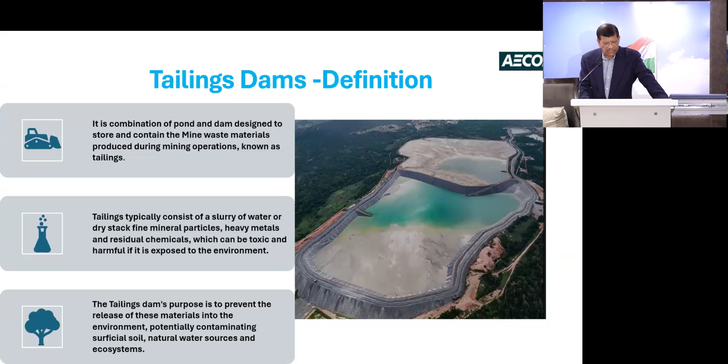In the initial phase, how can we store these fines? So the fines were converted into a slurry product where we add like 60 to 70% water into it and 30% solid, so that can easily take the material to a large distance through pipe.

So they were taken by pipe and got deposited. But we have to see that this slurry still contains all kinds of heavy metals and toxic materials, and also acidic materials, which can be harmful if exposed to the environment. So that's the main thing - that's why we cannot just let it go.

In the past, some people have told me that this slurry was diverted to a river, because people think that a river is a big flow of water, and if you put slurry onto it, it will dilute. But definitely that's not the case.

So we have to make sure that this slurry stays inside - it should not go anywhere else. That's why we are designing a dam to store it, so the dam will protect all the slurry material, and that is what's called the tailings dam.

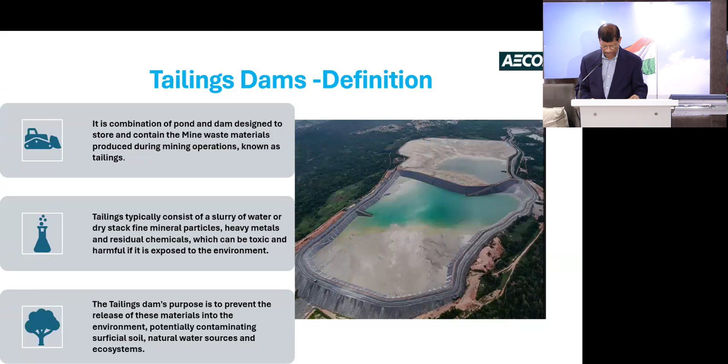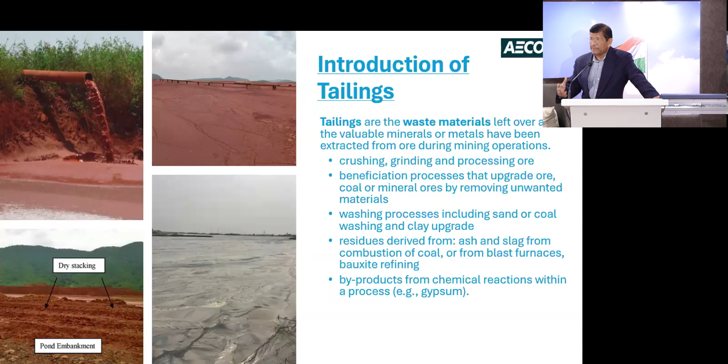And also a lot of plant chemical byproducts are also fines - the chemical reaction process like gypsum also collects fines. So these are where the fines are generated.

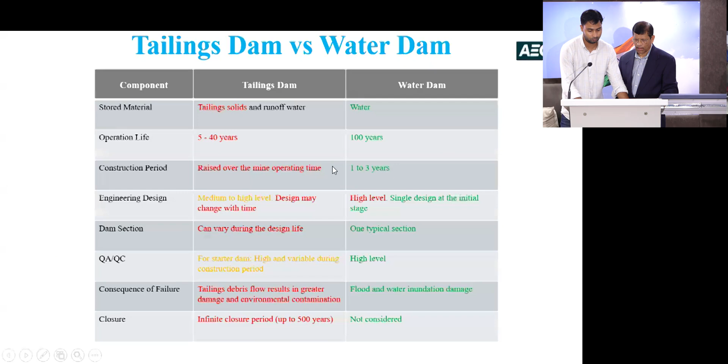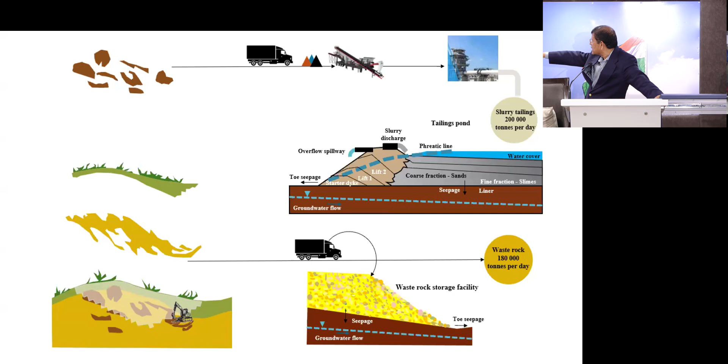This is a picture which demonstrates most of the process, how in the mines we have overburden and then the ores, and those ores are taken by a dump truck, dumped into a crusher, and then from the crusher it goes to the mill, and from the mill plant the finer waste is produced and stored in the tailings dam. You can see this is the dam structure, and the tailings along with water are stored in there.

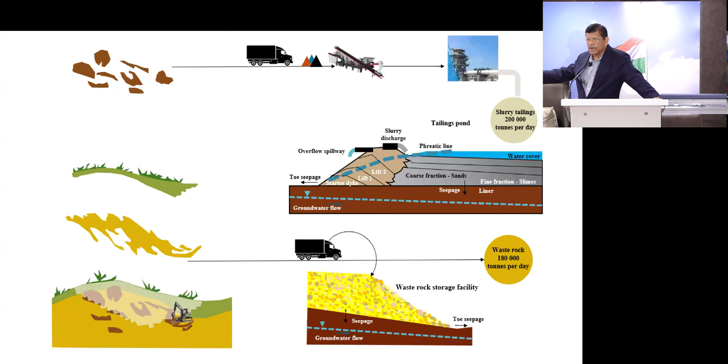The tailing process and the waste rock are different because the larger material, waste rock, which doesn't go to the crusher in the mines, is also deposited as a waste dump. But from an environmental point of view, the design consideration is the same - these waste materials also contain a lot of acidic and toxic minerals, which is why we want them not to come into contact with the environment.

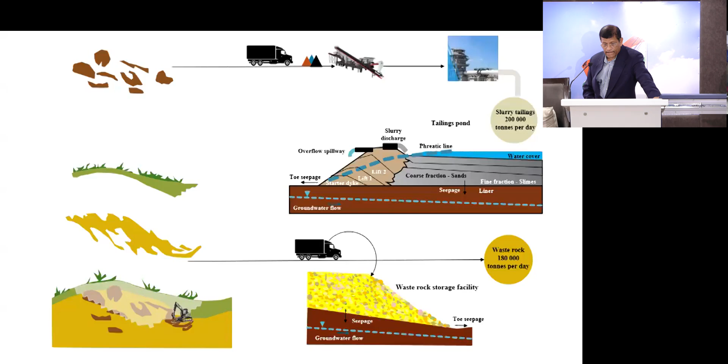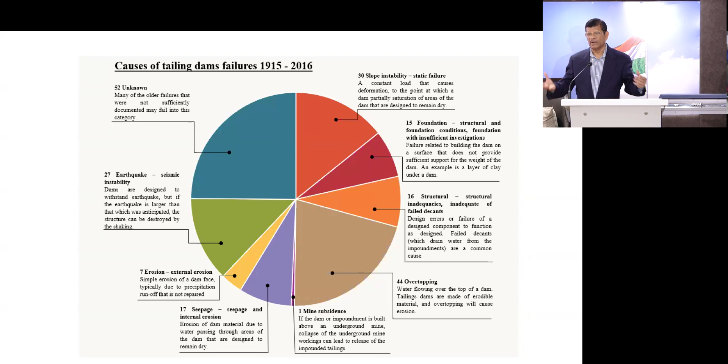What is the issue here? I mentioned that in the 1960s we started somehow storing these tailings, and by 1980 we found some failures, and those failures created devastating consequences for the community and environment. Then people thought, it is a different thing, we have to think again about some kind of design technology - that's why around the 1980s all kinds of design technology developed.

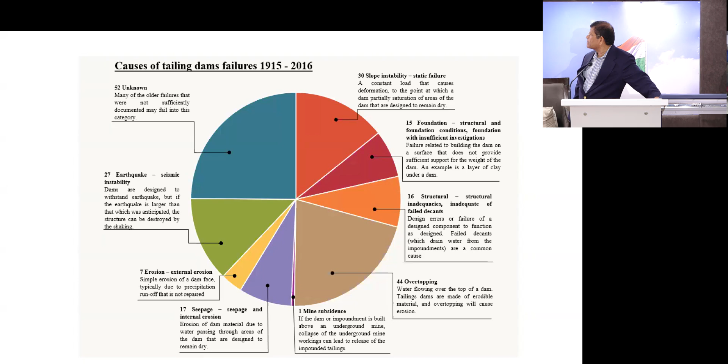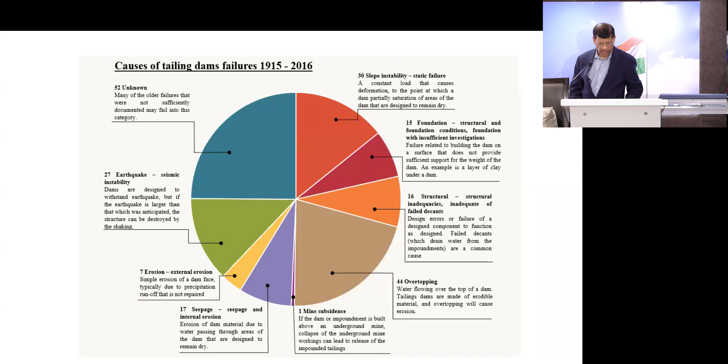With time you can see, from 1915 to almost 100 years later, we have seen a lot of failures, and these are the different causes of failure. We can see the better way to understand the failure, because the failure of tailings dams creates all these environmental considerations.

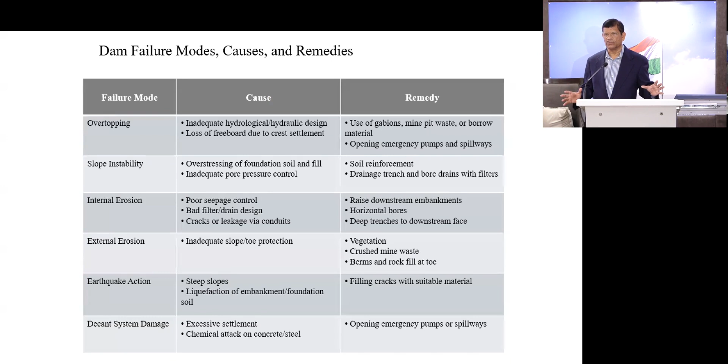Because if it is stable and it doesn't go to the outside or it doesn't interact with the environment, then everything is good. But when it fails, you can see that it is devastating.

One of the failures which we will discuss at the end is the Brumadinho failure. I want to focus on that one because that failure changed the whole concept of design of tailings and also brought that global industrial standard. Why is that? Because in that failure, close to 270 people died, and another important part is it happened in Brazil.

15 engineers who were associated with that tailings dam were arrested, and some of the engineers are still not free, because the case is still continuing in a court in Germany.

And there was another incident that happened in 2015, and recently that verdict came. The court fined $30 billion to the mining company because of the 2015 incident, where the 2019 incident is much larger than the 2015. So this one definitely will be more of an economical failure to those mining companies.

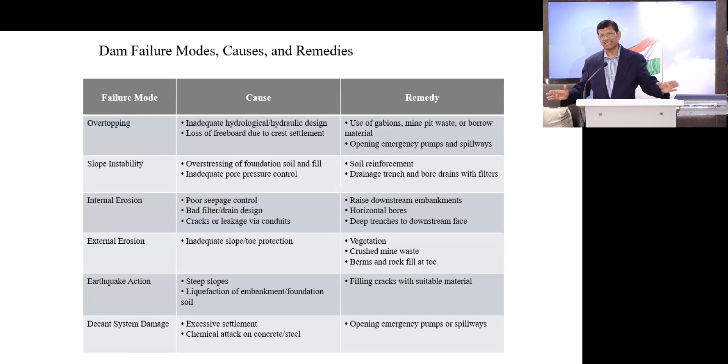That's why the people of England, like there is a church in England, they came up with a group of people, mostly an investor group. They came up with $20 billion generated, and the aim is to protect most of these tailings, mainly those tailings in very critical areas. Critical areas means very close to the population or where good critical structures are there. So in those areas they are focusing, and they are spending money to make sure those tailings dams are stable. That's why all this GISTM is coming.

But if you see the failure modes, the most important failure modes are overtopping and then slope instability, because we are making a dam there. That's like any earth dam, and these dams are very high also, some of them around 500 feet height. So those are slope failures, then internal erosion, also external erosion, then also earthquake, where the area is earthquake prone.

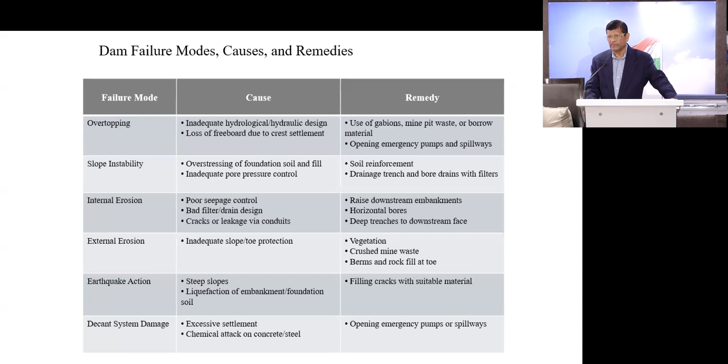Compared to the hydro dam, the tailings dams are more prone to failure during seismic activity. And then there is a decant system, which we will show in our next session, for water management. If the water management is not done properly, then there can be a failure. That's how these failures become important.

Initially, when people started designing the tailings dam, they thought that it's the same as any hydro dam. Even I think, by discussing here, people told me that in India also people thought it's a hydro dam, and they designed it on the same principle as the hydro dam. But when it failed, people realized that yes, this has to be treated separately.

So the basic difference between a tailings dam and a hydro dam we should all know, because the concept is coming from there. All we are doing - seepage, stability, even water management - everything is coming similar to a hydro dam. But we have to know the difference, because that is where we will change our concept when we deal with the tailings dam. So the first thing is the stored material.

The difference is in the hydro dam it's water, plain water. So even if there is a flood or it fails, it's water only, so the flood. But here it is the solid and the water combined. Solid and water combined is more devastating than the flood, because it is charged with these sediment particles. The energy is much higher than water when it fails. You will see that in one video.

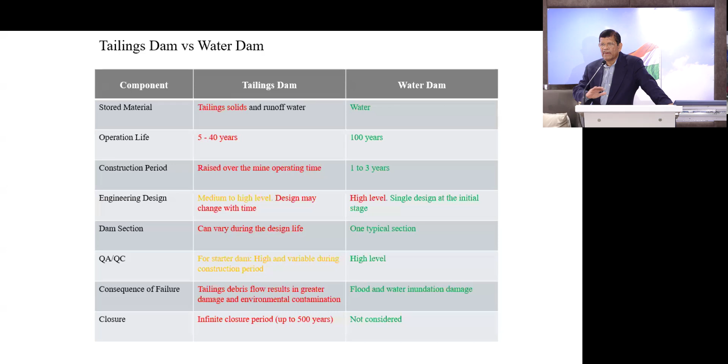Then the closure. This is a basic difference between a hydro dam and a tailings dam, because tailings dam has a closure. Once the mining is over, mining is stopped, we don't just leave it as it is. No, we cannot do that, because we have to make sure after mining, this structure is safe for the environment.

That's why from the beginning of the tailings dam, we also design the closure. Like when the tailings dam will get a permit, and mostly in US and Canada, when we go for the permits for the tailings dam, we have to show them this is our plan for the closure.

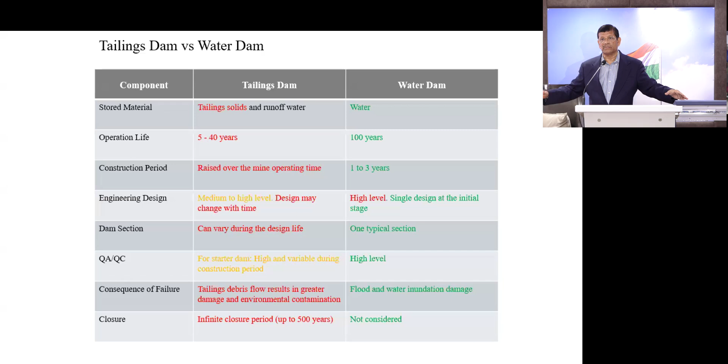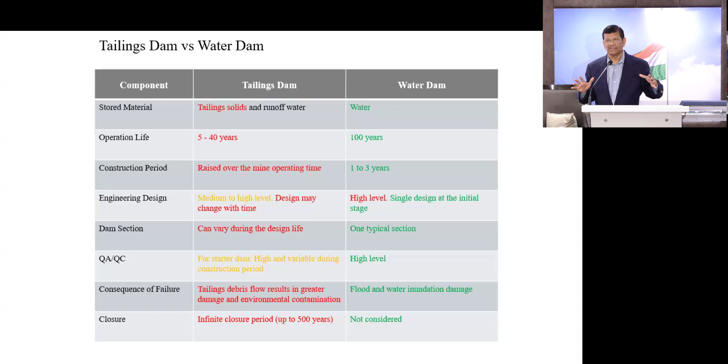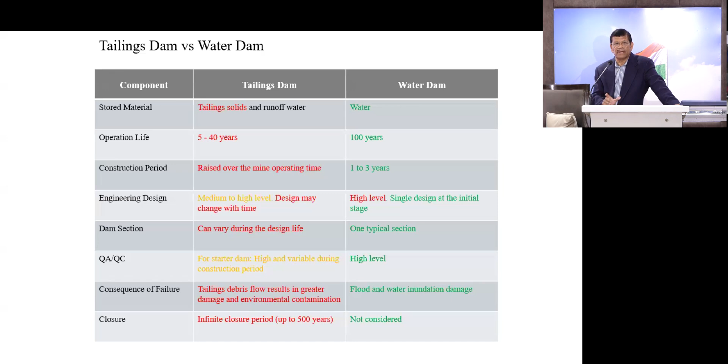So what the closure is, basically we put a cap on top of it, top of the whole dam. These dams are very large dams, you can see that their length is like 5 miles and width is like 10 miles. So all these structures will be capped and we have to make sure that it is environmentally safe. So this closure makes it completely different from the hydro dam, because hydro dam doesn't have any closure.

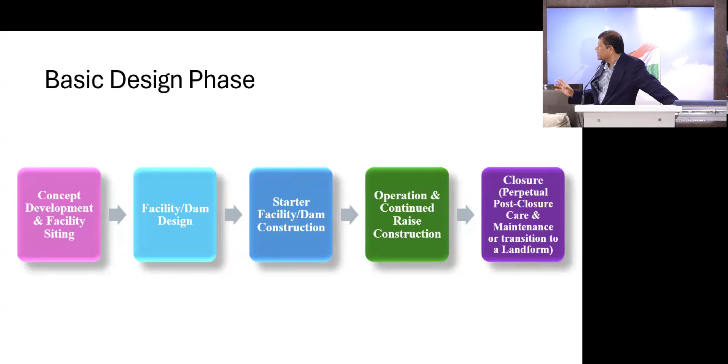Again, in the basic design phase, we start with a concept and we have a dam. How we will start with a basic dam design, we start with a starter dam. Any tailings dam will start with a starter dam, and that starter dam is an earth dam similar to the hydro dam, but that is a starting structure.

Then during the operation, then comes the operation. The initial construction phase is building a starter dam, then comes the operational phase. In the operational phase, the tailings dam is raised, and then final is the closure and also post closure.

Even after we do the closure, it might take some time to do that activity, and after we finish the closure there is also a post closure period, because we have to make sure these dams are stable almost forever, but right now people are thinking they will be stable at least 400 to 500 years. So after the closure part, we will also monitor it, that is our post closure.

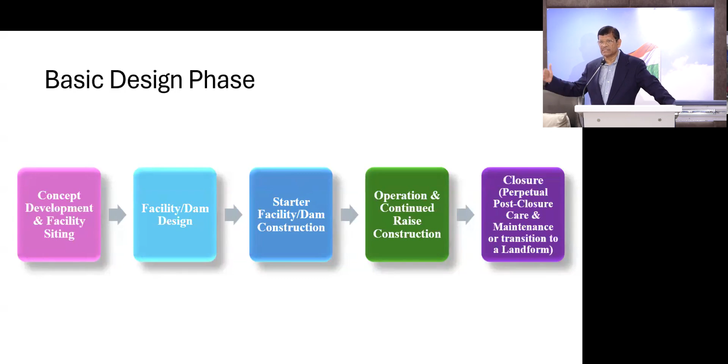So the basic design services, here we have 4 important players in the design of tailings dam. Can anybody guess who are the 4 important players here?

Definitely the first one is the owner, because he is responsible for the construction of this tailings dam. So the owner is number 1. Then the people who are helping them is the consultants. Then the third player is the agency, because any country, any state you go, there is an agency. In India also there is an agency, where when you first start you need their permission to do that. So the agency is the third player, and the contractor, because the contractor is the men who will be doing everything.

So these are the main four players, and these basic design services I will show you in the later part of the slide, like who is responsible for that.

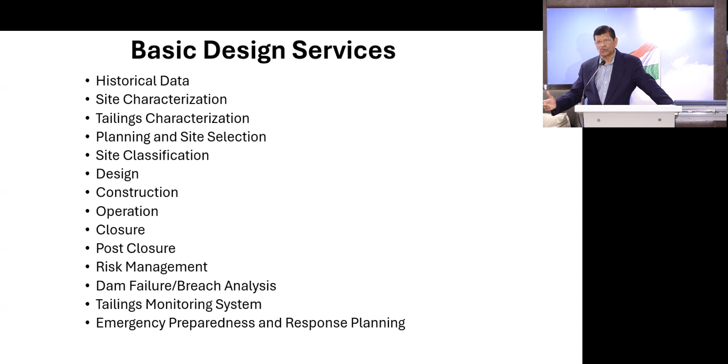Then we establish the tailings monitoring system, which starts from the beginning through closure and post-closure, because the monitoring has to show that the facility is stable and safe forever. There are many monitoring systems which we will cover in our courses.

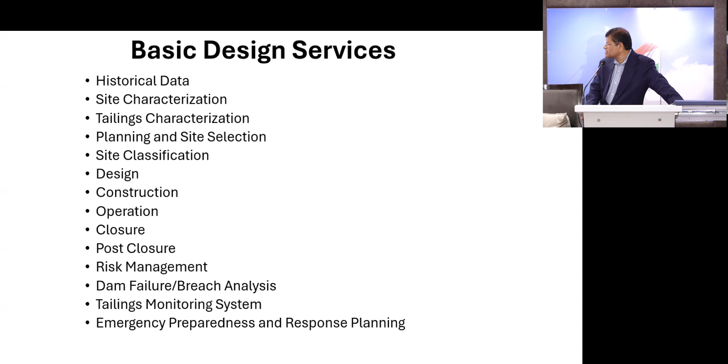Then the last part is emergency preparedness and response planning. Each tailing site should have that, because it's mostly needed at the time of failure, to know what you should do.

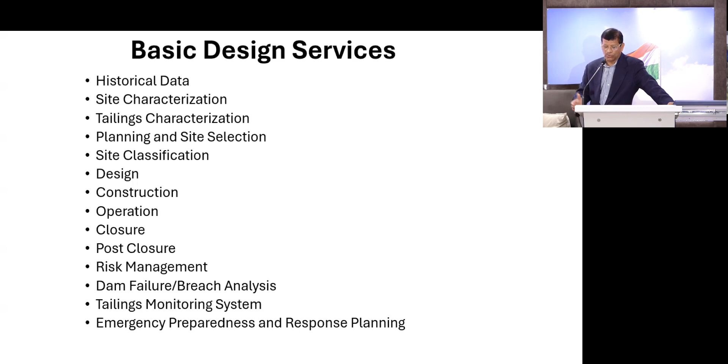So we start with a conceptual design, then move to pre-feasibility, then feasibility, and finally come to the detailed design.

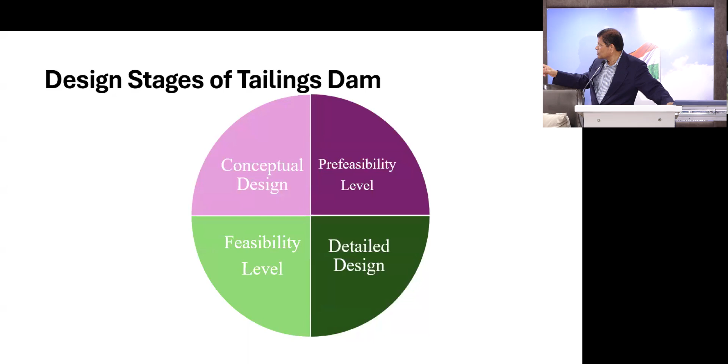Just as an example of how much money is spent during the design process: the pre-feasibility level expense averages 10 million for any particular site, and that's only for the pre-feasibility level. When you go to feasibility and detailed design, the cost can definitely be much more.

Again, on siting: mostly in mining areas, except where the plant is, because if you consider the plant, we're coming to plain areas like a coal plant or alumina plant. There you can also have a tailings dam in the plain area. But in mining areas it's mostly hilly, mountainous region, so there we look into the valley, like a single cross valley impoundment.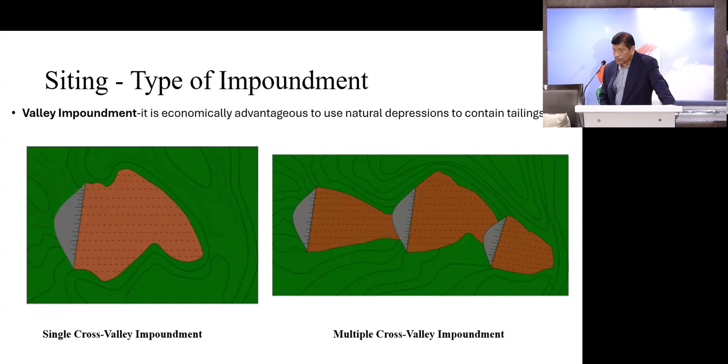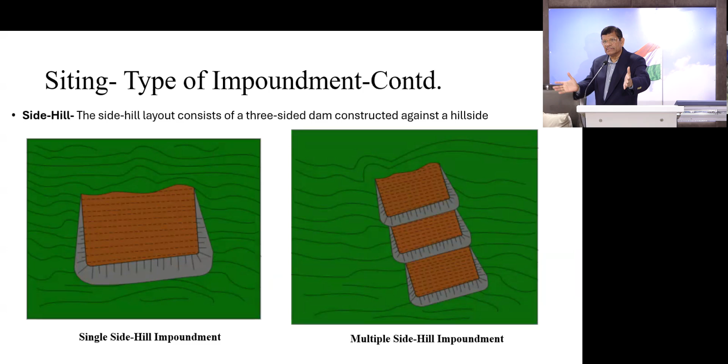This protects the structure. Or if there's a multiple cross valley, you can have multiple tailings sites there, at upper level, middle level, and lower level. Same thing on a particular hillside: in the cross valley, you are in the middle of two valleys, so you can have a small dam and take advantage of all the steeper slopes surrounding it.

But if it's a valley with a mountain on one side, then only one side has the mountain slope, and the rest you have to close off - this is a single side hill impoundment. On three sides you can have the dam, and in the middle you have the tailings.

Again, you can do this multiple times, starting from the top, then going to the middle, and at the bottom on the same slope.

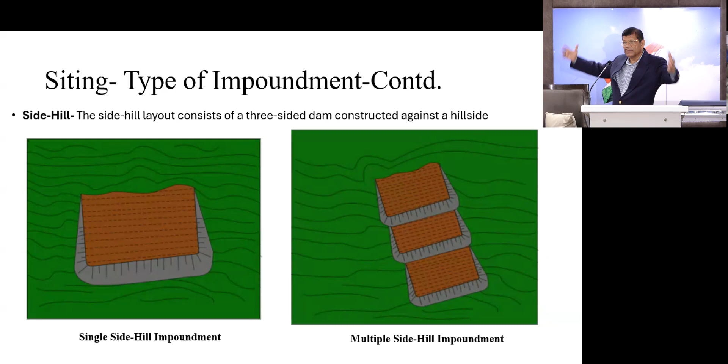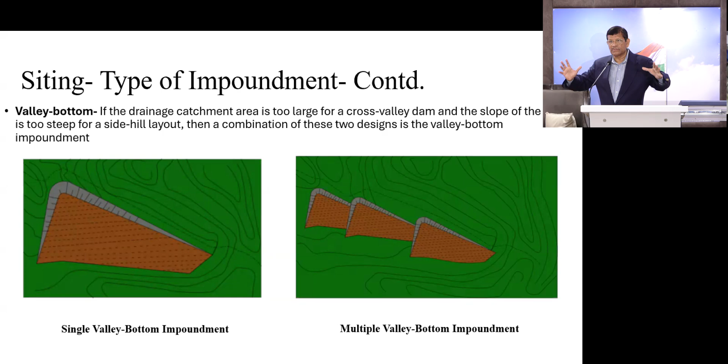Similarly, if it's a valley bottom, you can see that at the bottom side we can have a single valley bottom impoundment or a multiple valley bottom impoundment. Here we are mainly taking advantage of the natural slope. If it's a mountain with slope on one side, then definitely most of the structure will be more stable.

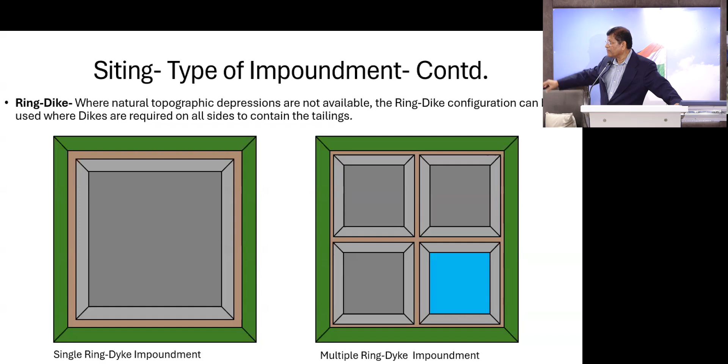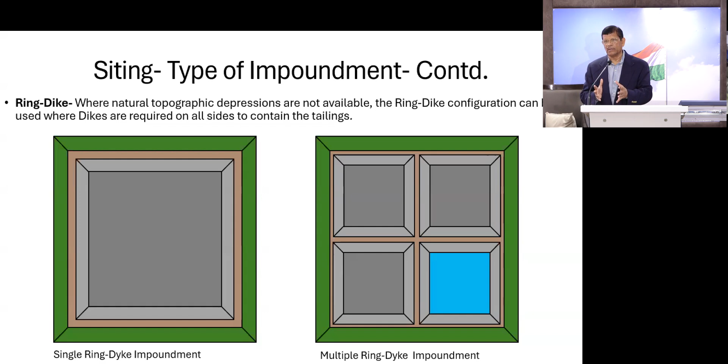So all this green is the dam, and in between, grey is the beaches. Again, you can have an impoundment there also, because all these tailings dams are not only storing the tailings, but also storing water - the storm water. So in our design, we will also have to consider the storm water.

The main criteria we look into in the design is geotechnical and geological conditions. That's the fundamental and number one criteria, because we have to make sure the geology of the site is helpful. What are the subsurface conditions there, and then when we design it, what kind of dam we can design, what kind of material. So geotechnical condition of those things are very important.

Then also we look into the hydrologic and climatic conditions, because most of the hydrology depends on the climatic condition. What is the rainfall? If there is a storm water, what is our PMP, probable maximum precipitation, that is called PMP. That is mostly used in most of the design, which we will cover in a later session.

Then the construction and operational factors. Definitely when you go and construct in a mining area, meaning mountain area, it's different. And when you construct in a plain area, it can be different. Then seismic activity, I mentioned before, if it is a seismically active region, you will have to consider it a very high level structure, and look into the seismic things. We will have a session also on this topic.

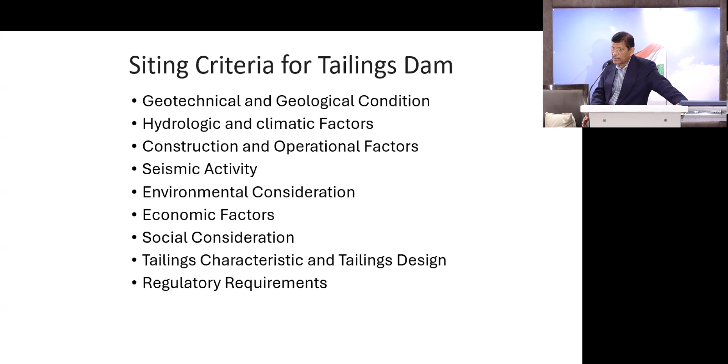Again, the tailings characteristics and their design and the regulatory requirements. Regulatory requirements varies from site to site, country to country. In US, we have a federal agency called EPA, Environmental Protection Agency. And also every state has a Department of Environmental Quality. Both EPA and the state department will be involved in all the stages, from the planning, giving the permit, to the operation, to every stage they will be involved.

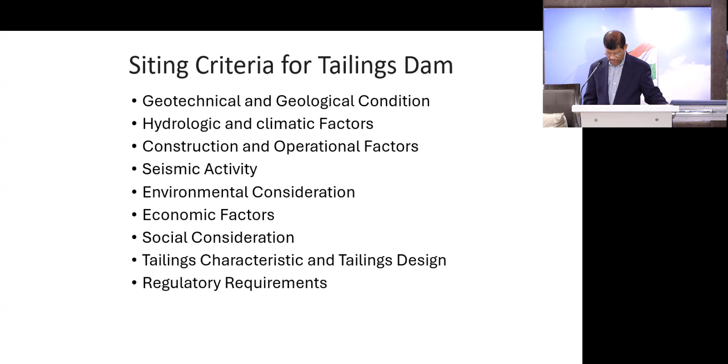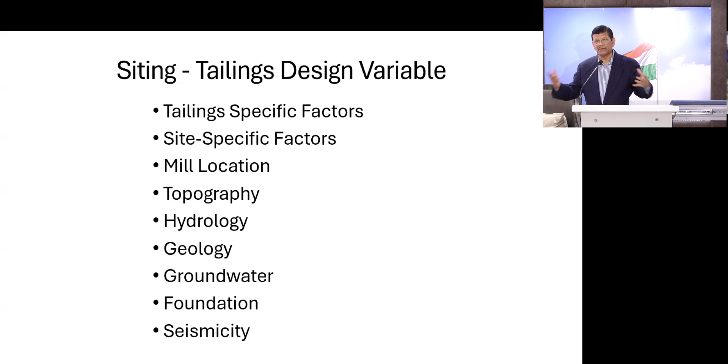Then the foundation of the tailings, because these are very large structures taking a lot of load, we have to make sure the foundation is good. One major failure happened in Canada called the Mount Polley failure, and that occurred because in their foundation there was a 3 feet clay layer which was somewhat ignored during the design process. They couldn't see that, or even if they saw it, they thought that 3 feet layer was okay and would not cause any more damage to the structure. But when it failed, all the experts who determined the cause of the failure said that the 3 feet layer was responsible. It may be a very small layer, but if that layer fails, then all the material can go.

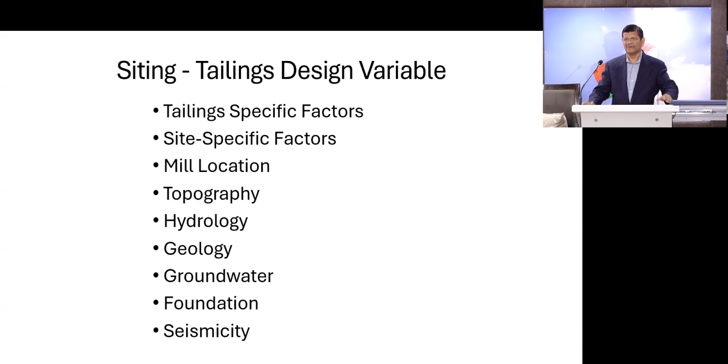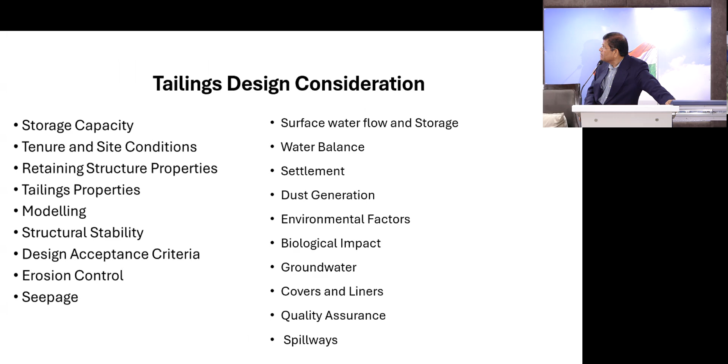In the design, we find all these properties: the storage capacity, site conditions, the structure, the retaining structure, that's the dam. Though we will see in the later part that the dam does not necessarily have to be an earth dam, but we use the same tailings to construct the dam and the same tailings to build the ponds.

Then the tailing properties, the modeling. Modeling is also very important, and I can mention that right now, mostly in US and Canada, for each site even the client wants a 3D level model for all their stability analysis, seepage analysis, stormwater analysis, and groundwater analysis, everything. They are thinking that we should have a 3D model. These are all numerical models.

But in the basic design, when they started in the very beginning, everybody always followed a limit equilibrium model. In the later part, we will discuss why the limit equilibrium model is now used less, as people are moving to the numerical model.

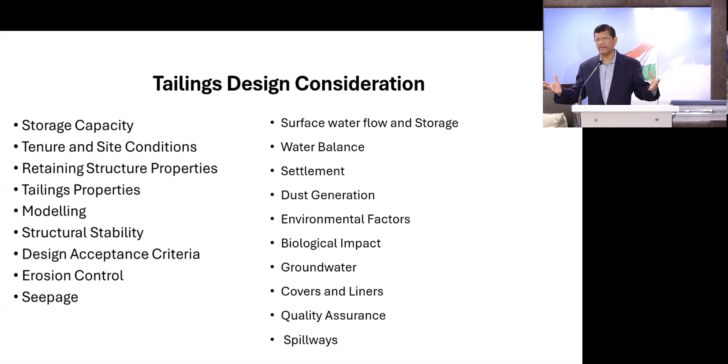Quality assurance, and you can have a spillway also, but most tailings dams again we design so that we do not allow overtopping. But in wet areas, you might have a good spillway, you can design a proper spillway and take out storm water.

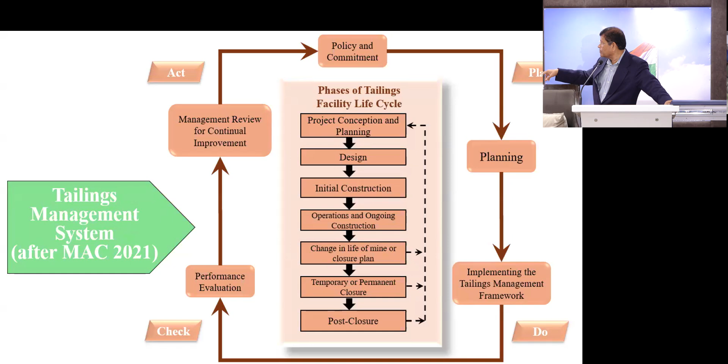This is again, we will come back to this slide when we discuss the tailings design. The global design will go there, but this is all the concept and we can see how they evaluate it.

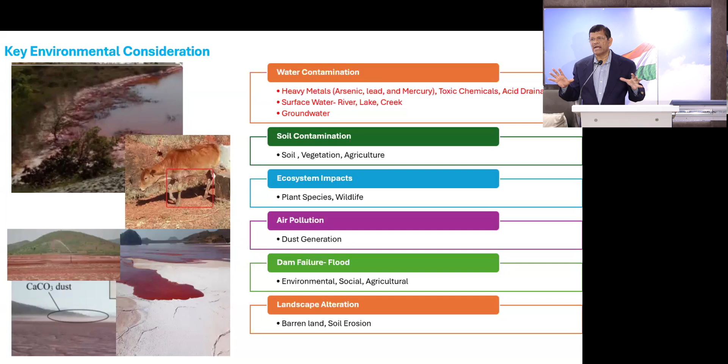So what are the environmental considerations? Water: we have already discussed, either surface water or groundwater must be protected. Soil: why is soil contamination important? Because it can affect agriculture. If there are agriculture fields surrounding the tailings facility, mainly in plain areas, since you cannot find vast empty land, any contamination of the soil means your agriculture is also lost.

Then the ecosystem: we are in a mountainous region, so we have to look into whether there are habitats and make sure they are protected and not affected. Air pollution is also very important because it creates a lot of dust, and also those in the plant, we will have to look into for air pollution, and make sure our air is good.

And then dam failure, we have to consider that, because when it fails it not only affects surrounding areas, if the material goes into the river, I will show this slide, it can go further and further.

Then the landscape alteration: when we start building or construction in the initial stage, we are changing the landscape, and when we close it, we are also changing the landscape. So in the whole evolution of landscape change, we have to make sure our surrounding environment remains the same, and the air is not changing the surrounding environment.

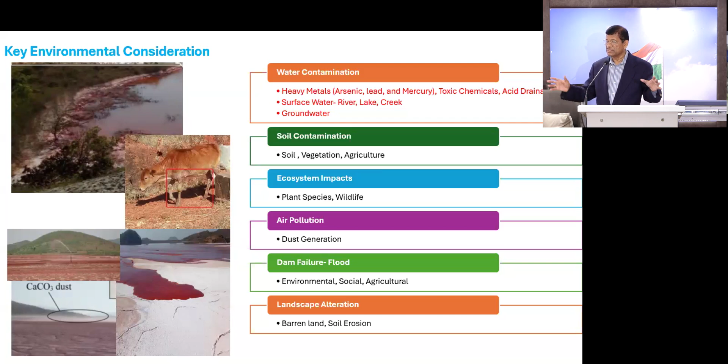Again, we mostly discuss about the slurry, but things are changing with time. I can tell you, 20 years from now, maybe we will not be talking about slurry tailings anymore. So what's the next step?

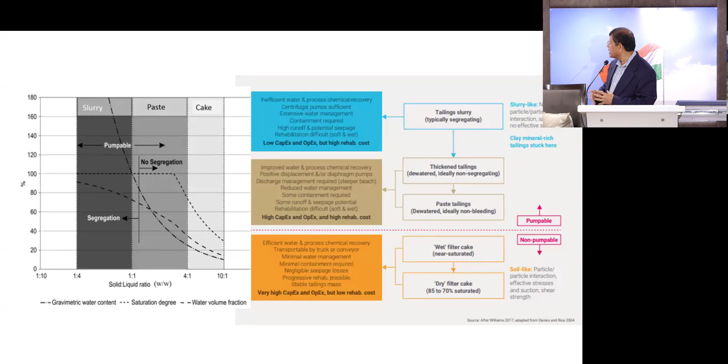The next step is, it can be a paste or a cake. We call it mainly a dry stack. A lot of the bauxite mines, I think the trend is, forget this slurry, produce all dry stacks. We call it a thickened tailing and also a filtered tailing. These are coming up very fast, and research is going on, but still in US, Canada, Australia, and some parts of Europe, it is still in the research stage. There is not a fully developed design for all these structures.

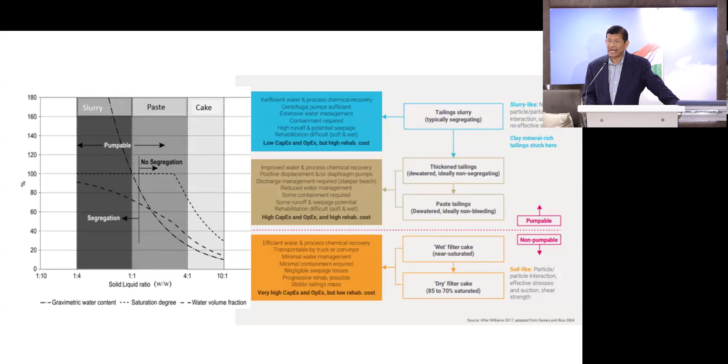But the thing is, under GISTM everything is covered. Your slurry material, from the environmental point of view, whether it is slurry or a dry stack, everything should be same. We have to make sure it is not affecting the environment. Some of the dry stacks I have dealt with or reviewed in Africa also failed, because these dry stacks also contain 15% moisture. And if you see the vast volume, 15% moisture is not a small thing.

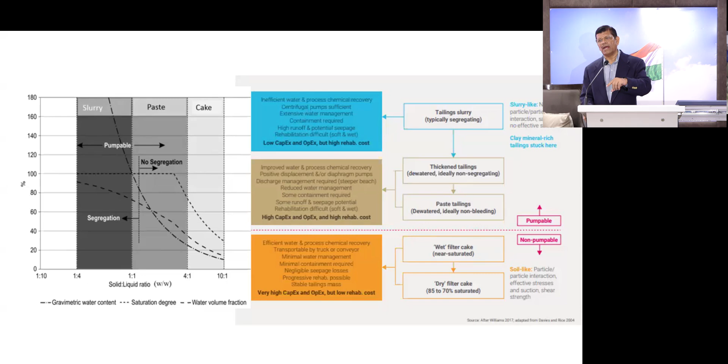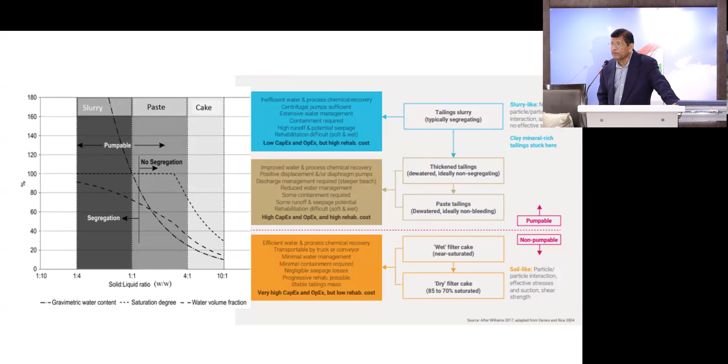So that can also cause the same failure we see in slurry dams. But definitely dry stack will be the future, because dry stack gives us more space, almost 3 times larger than slurry. And the second thing is, dry stack will definitely be more stable than slurry. When it fails, slurry can go and become more devastating while the dry stack won't do that much. So that's why the future is the dry stack. But from an environmental point of view, we'll have to treat everything the same.

And they have formed 15 principles based on these 6 things and come up with 77 requirements. So for each site to be GISTM compliant, we have to tick mark all the 77 requirements, which we will discuss in one session for GISTM.

You see how when this failure was happening, there was some activity, actual drilling activity was going on. It was monitored by a drone camera, that's why they took the whole video. You can see how it fell, and then you look into that rail line - this rail train was going on during that time. You will see what happened to that train line also, and how it is coming.

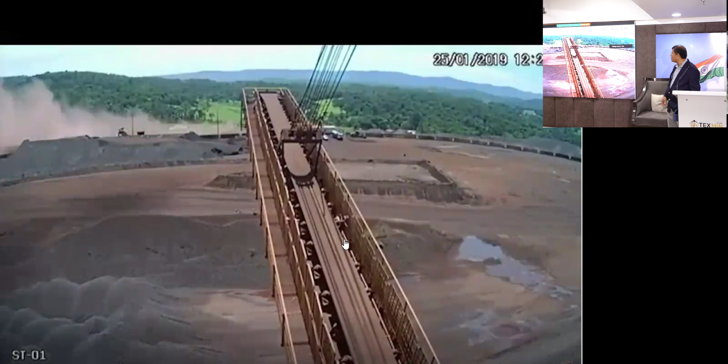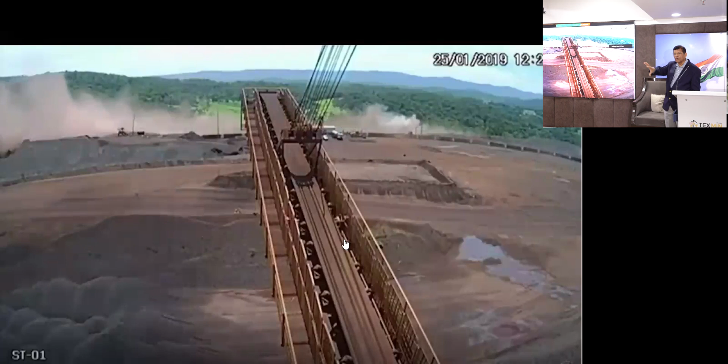You can see the difference between the flood and this debris flow - we call it a debris flow. How much energy it is creating. This way it is following, and you can see there are waste dumps also on the way, and it doesn't matter, the whole thing is taking that. You see the video, you see how this flow is developing, how much devastation it is. So those berms or anything, waste dumps, do not stop them.

So sir, this is wet slurry, right sir? This is iron tailings, yeah, along with water. Around, this is tailings, it's a slurry deposit. Slurry, that is what I am asking. Tailings and water is there. Yeah.

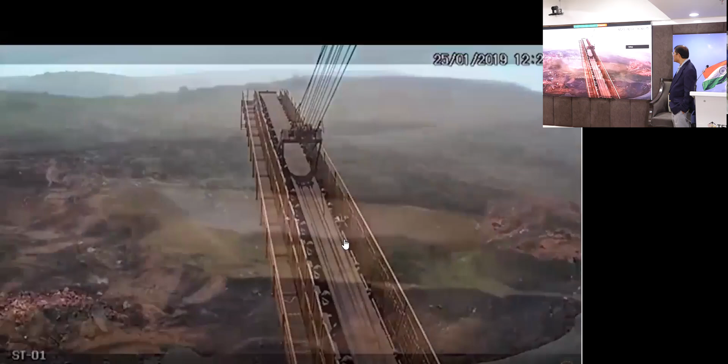Brumadinho. Yeah, it's a Brumadinho failure in Brazil. That's what changed the whole tailings dam scenery. This is after the failure, you can see that bridge, the railway bridge.

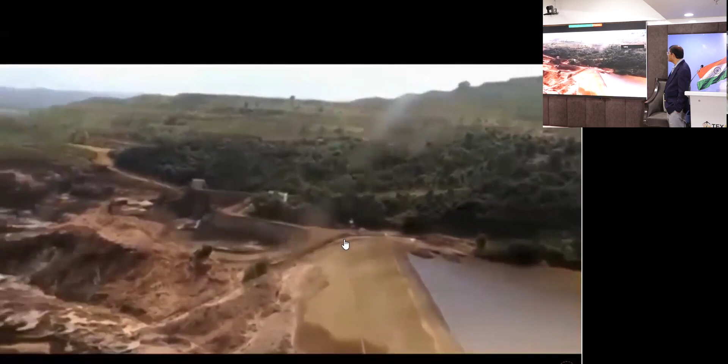You can see that bridge also fell, and it went into the river, everything went to the river.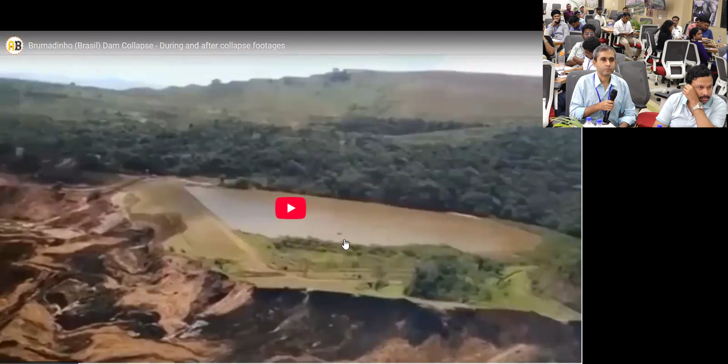If you are involved in the stability analysis of any structure, whether a dam or a slope, mostly in soil mechanics books it's only mentioned about the limit equilibrium method, which is a very simple, empirical method. What limit equilibrium method does is assume there is a critical failure plane, and we look into the physics and all the forces, and see what are the resistant forces and what are the driving forces. We come up with the factor of safety, and we become conservative, saying the resisting forces should be higher than the driving forces. So factor of safety should be higher than 1.5 for all hydro dams.

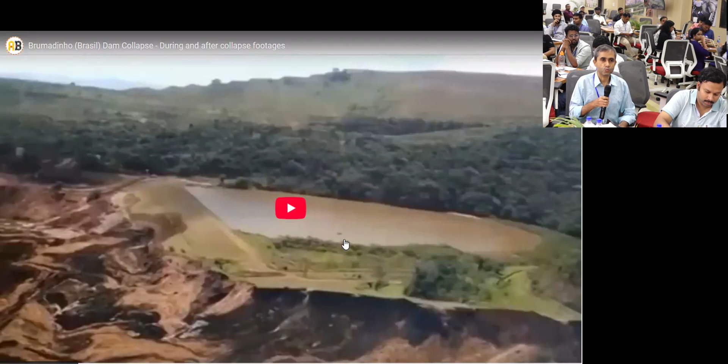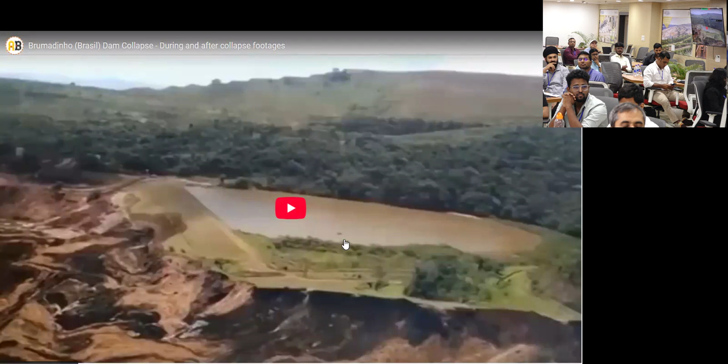So initially when people started doing tailings design, they adopted the same thing: do a stability analysis and adopt a 1.5 factor of safety. But then that 1.5 also became 1.3 in some cases, because if it's temporary, like during the operational process when we go and do the stages, some adopted a factor of safety of 1.3. But when it is complete, at our closure time, when the whole structure is complete and closed, it has to be 1.5.

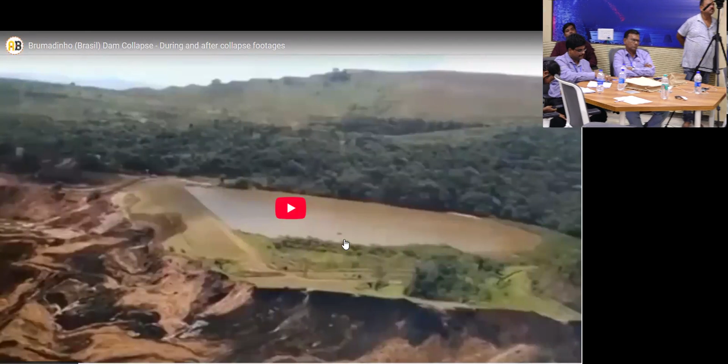But what's the difference with numerical modeling, why do we need a numerical model? When I started doing numerical modeling, my first full-fledged tailings project, I worked on a project where a tailings dam failed. I had to develop that model, and 3 or 4 experts in the world also helped me. We worked as a team, mainly for litigation purposes, because that failure cost our mining client close to $30 million. They found it was mainly due to wrong design, that's why it failed. So that's why I developed the model, and we all decided to develop a numerical model. At that time very few numerical models existed.

But with time, what we see, as I mentioned before, is that the hydro dam is a static dam, and this limit equilibrium failure analysis is also a static model. But tailings dams are dynamic, their properties are changing. We'll cover that more when we get to stability analysis and seepage analysis, and see how that is different. In brief, a numerical model can model the dynamic condition, while the limit equilibrium model cannot. So the limit equilibrium model can be adopted at the design stage, where you don't have the tailings yet, you don't have anything, so you can do a simple model there. But as you go to higher and higher stages, you need a numerical model, otherwise the simple empirical model cannot give you much of an answer.

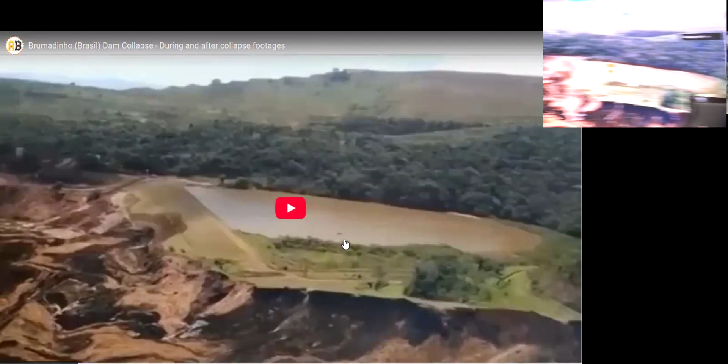Again, it all depends on whether it's for your own design or you are submitting that to the agency. Some consultants are doing it because we are the owners for those red mud ponds, so we are getting it done from the consultant. They submitted their recommendation saying we have to take some precautionary measures because of the 1.3.

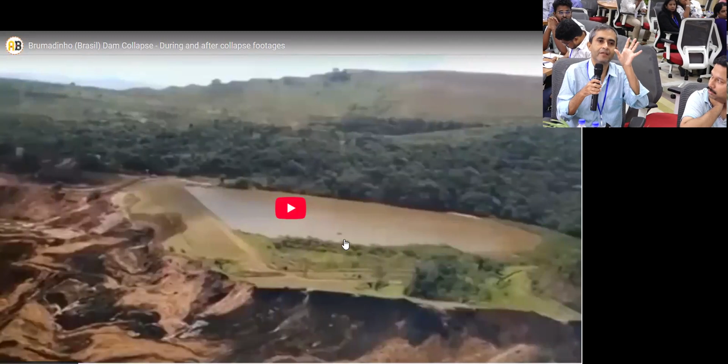But as I visited the site, the red mud dam is stable. There are no slope failures, no surface failure, no toe failure. But the value is showing 1.3 as the factor. This is seismic. Yeah, seismic, I will cover that also in the seismic part.

Currently, we are coming up with the guideline that there will be no more pseudostatic analysis. Pseudostatic analysis will become obsolete. So in that case, if 1.3 is coming, we should not be worried about that, right? Sir? We should not be worried about that.

Again, in pseudostatic analysis we are considering 1.1 because it's seismic, it's not regular. Because under seismic you are mostly considering the residual strength, not the peak strength. But under normal conditions you are looking into the peak strength, so that peak strength should be minimum.

Again, the 1.3 is a temporary case. In a temporary case it can be 1.3. But you have to show that, like in the US and Canada, temporarily you can show 1.3, but overall, because when you design it, it has to be the whole thing, you have to show that it is a 1.5 factor of safety and that is maintained.